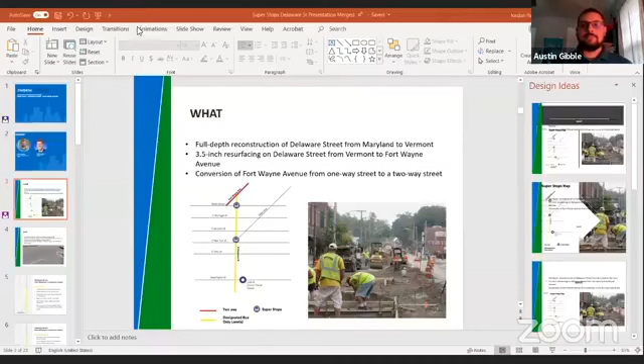If you all will forgive me, I know how to share a screen. I've done this many times. Okay. All right.

And without further ado, I will go ahead and pass it on to Austin. Sure. Hi, everyone. My name is Austin Gibble. I am a project development planner for IndyGo, and I am the acting project manager for the superstops and transit portions of the Delaware Street reconstruction project.

So we'll go ahead and do a quick overview of the basics, of what it is. This will be between Maryland and Vermont streets, a full depth reconstruction of Delaware Street. So what this means is that basically we're going down to the dirt, we're starting over with Delaware Street. Then north of Vermont Street, there will be a 3.5-inch resurfacing - grinding down that level of asphalt that's on top, putting a new layer of resurfacing above. We'll also be doing the same thing to Fort Wayne Avenue, as well as converting it from a one-way street to a two-way street.

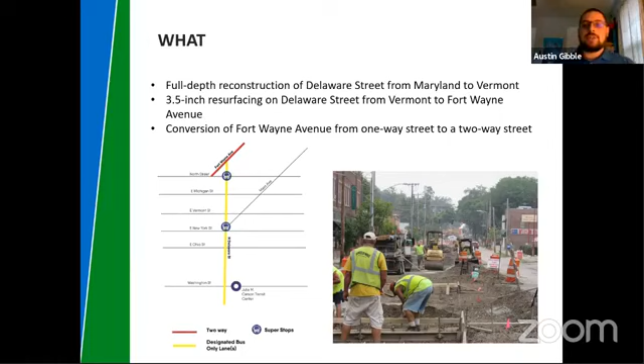And why are we doing this? The condition of Delaware Street is pretty poor. It has deteriorated to the point where we can no longer just mill it off and resurface it with new asphalt, at least between Maryland and Vermont. Additionally, there are still streetcar tracks - you can kind of see them in that picture there, if you drive on Delaware in front of the City County Building, you may see them poking out of the asphalt. Indy's streetcar system was never really dismantled, it was just kind of paved over, and these streetcar tracks result in cracks that allow water to get in, freeze, and create potholes. So we're going to take those out.

Additionally, as the Marion County Transit Plan is continuously implemented on a rolling basis, the number of buses traveling up Delaware Street from the Julia M. Carson Transit Center are gradually going to increase. So we will be adding a bus-only and bus-and-turn, or BAT, lane on the right-hand travel lane of Delaware Street. It essentially acts as a de facto bus lane already - there's already a lot of buses traveling that way on Delaware Street every 10 to 15 minutes. So what this will do is organize the street better and allow buses to continue traveling forward reliably, and also allow motorists to understand that there's going to be a bus in this lane, so you don't need to weave in and out to get around buses.

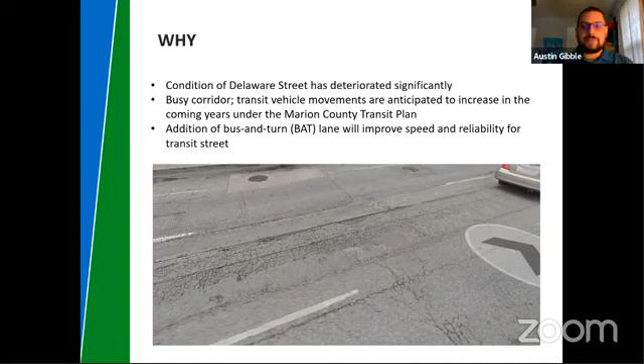So Ben, I think I will pass it on to you, or Will. All right. Hi everybody, can everybody hear me? Yes. Okay, all right. My name is William Ward. I am the lead designer for the portion of the project along Delaware Street from Maryland up to Vermont. I just wanted to give a brief rundown, a little more detail about what we're actually doing on this project.

Delaware Street from Maryland up to Vermont will be a complete pavement reconstruction. We're going to have dedicated bus lanes in this section, and they will be painted red.

Sidewalks and curb ramps we're going to improve on an as-needed basis, maintaining sidewalk when it's in good condition. Any curb ramps that aren't ADA compliant will be brought up to current standards, and any sidewalk that's deteriorating will be replaced as well.

The current signal at the transit center is going to be removed, and the old trolley tracks underneath the pavement along Delaware will be removed also.

Another intent of this project was to help improve some of the drainage that's ponding on the roadway. So the roadway cross slopes were altered a little bit throughout this area to help eliminate the pockets of standing water that you see on the pavement.

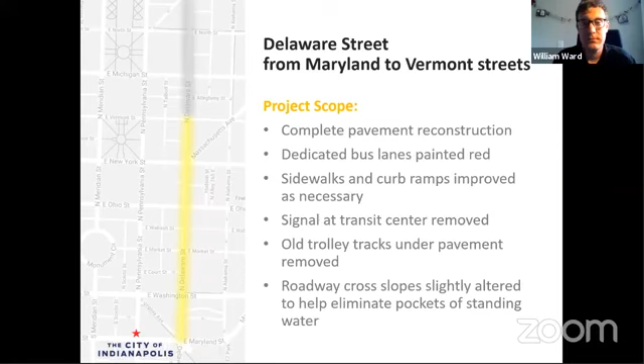As far as construction goes, the plan is to construct the roadway one half at a time, with the eastern side of Delaware Street being constructed first. After the eastern side is constructed, the eastern lanes will be opened up to traffic, and the western side of the roadway will then be constructed.

During construction, there will be no parking permitted on Delaware Street. We just need to utilize the existing parking lane as a travel lane in order to try and keep traffic moving as best as possible during construction.

Driveways to the transit center on Delaware Street may be closed for one weekend only in order to reconstruct those driveways. We're only allowed to close that for one weekend because it's a very busy bus schedule, and we need to minimize the impacts to those buses in the transit center.

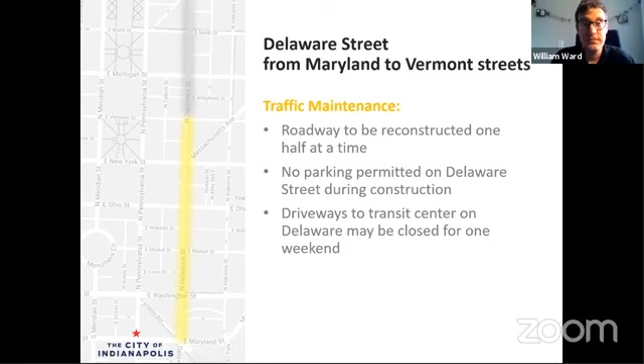Here is the typical cross section of the roadway. In the completed condition, you see that we'll have 4 travel lanes along Delaware, and you can see the addition of the bus lanes as well in front of the transit center. Bus lanes will run the length of Delaware Street from Maryland all the way up to Fort Wayne Avenue.

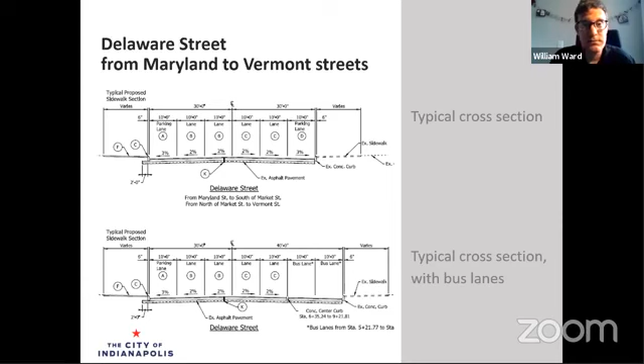Various intersections throughout the project area will be impacted. For pedestrians, the plan is also to repair the sidewalk on the eastern side of the roadway as needed during this time, so pedestrians will be detoured along the western edge of the roadway along the sidewalk on the west side.

Virginia Avenue will be closed during the western portion of the construction when the western lanes are under construction. As you can see, the traffic will shift to the east side of the roadway for this portion of the project.

Again, we will need to use the eastern parking lane as a travel lane, and pedestrians will be able to use the sidewalk along the east side of the roadway, the reconstructed sidewalk with the accessible ramps.

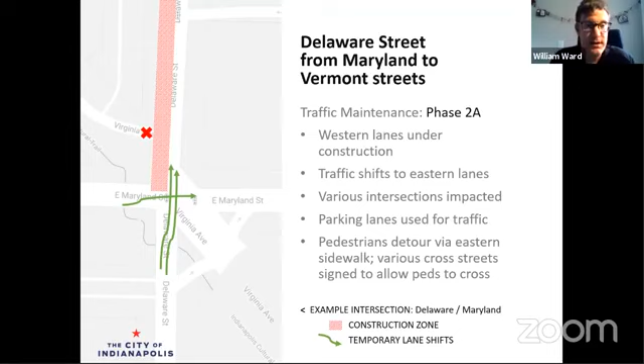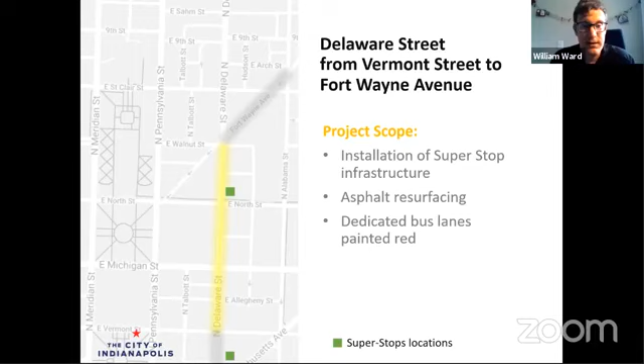The scope of the project from Vermont Street up to Fort Wayne Avenue includes a resurface, so Delaware Street will be resurfaced, and there's also going to be a super stop constructed up near North Street. Through this area as well, there will be dedicated bus lanes that will be painted red.

For the maintenance of traffic for the super stop, it's a similar concept. We'll be closing traffic on the eastern side of the roadway and utilizing the travel lanes on the west in order to fit construction equipment in there to build the super stop as needed.

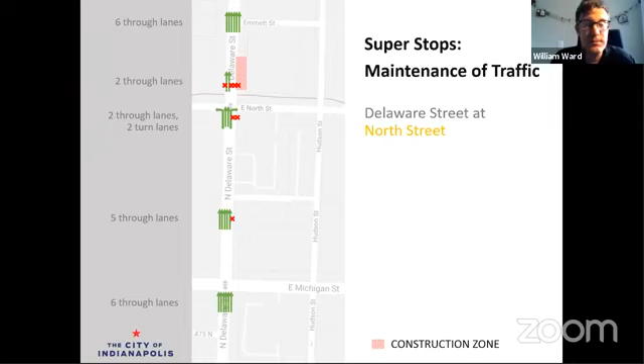Same concept here up at North Street. Construction of the super stop will result in the closure of the eastern lanes in order to get in there and do the work that the contractor needs to, and traffic will be maintained along the western lanes.

Fort Wayne Avenue from Delaware to Alabama will be resurfaced throughout this area, and the roadway will be converted from a one-way roadway to a two-way roadway, able to support two-way traffic after construction.

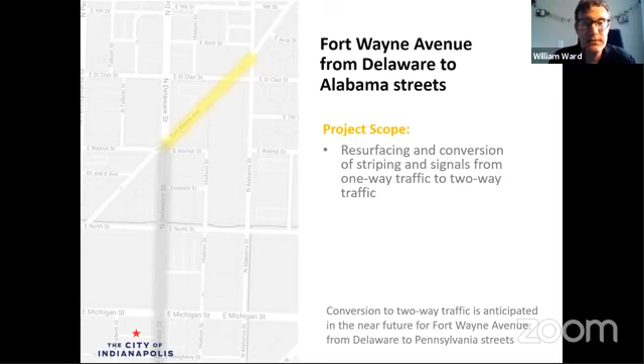During the construction on Fort Wayne Avenue, there will be a detour. It will consist of Alabama Street, a route along Alabama over to North, and then up Delaware.

Traffic on St. Clair Street will be permitted through the construction zone along with warning signage and nighttime flaggers.

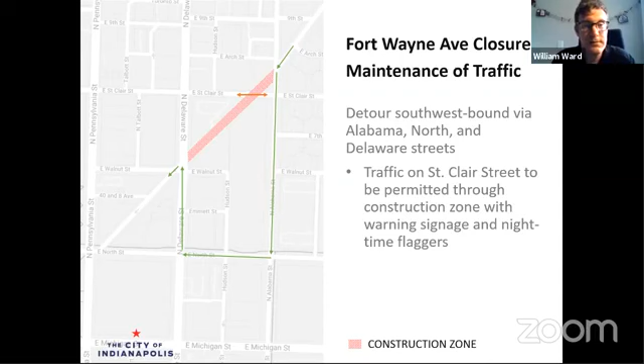So here's the super stops portion of it, and here's the transit improvements portion. The super stops are an emulation of something called Loop Link in Chicago. Same basic concept, where it's improved transit facilities and bus lanes to improve the performance of local buses on certain streets in the city center.

So it includes that bus and turn lane, but it also includes physical structures that will have real-time signage, security cameras, and larger shelters that are 20 feet long by 5 feet deep. These will have solar lighting in them. The platform itself is about 9 inches high, so it's not perfectly level boarding like you'll see on our bus rapid transit services, but the step height between the floor of the bus and the platform will be a lot less. So it's easier for wheelchair users and it's easier for people to get on and off, and it helps speed that boarding and alighting process.

Additionally, there will be a ticket vending machine. These stops are very busy, or their adjacent stops are very busy today, and these will also consolidate some existing stops. For example, the bus stop at Market and Delaware will close, and this will become the new stop or transit center. They're about a block apart.

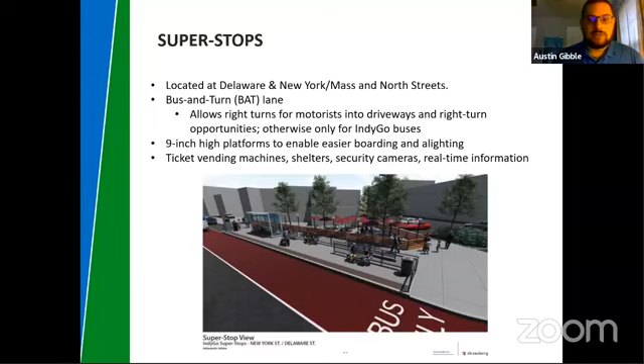This means that we need people to board and get off the bus as quickly as possible, so they can buy their ticket at the ticket vending machine and then tap it once they get on the bus instead of fumbling with cash at the fare box on board. Additionally, there will be ADA compliant ramps, some railing to designate where the waiting area is, and benches.

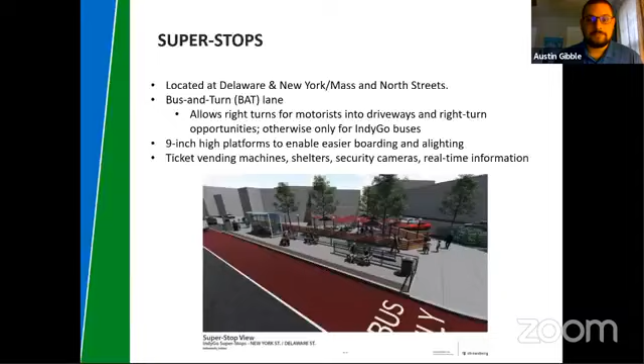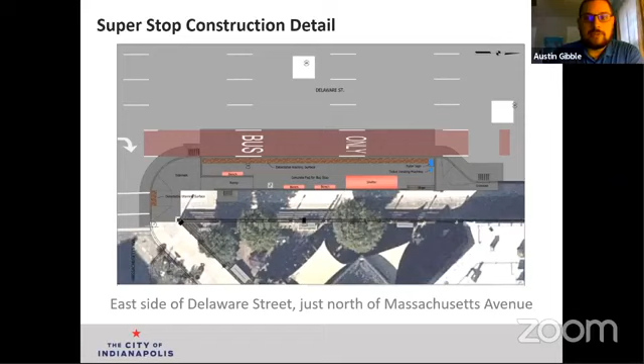This is a bird's eye view of the New York and Delaware Street stop right there at the corner of Mass Ave. You can see the curb ramp, some stairs, a ramp at the far north end to accommodate delivery vehicles, the bus only lane, sidewalk improvements, pylons, and ticket vending machines.

And this is the same thing for the Delaware and North Street. You can see that we will not be impacting the cultural trail crossing there.

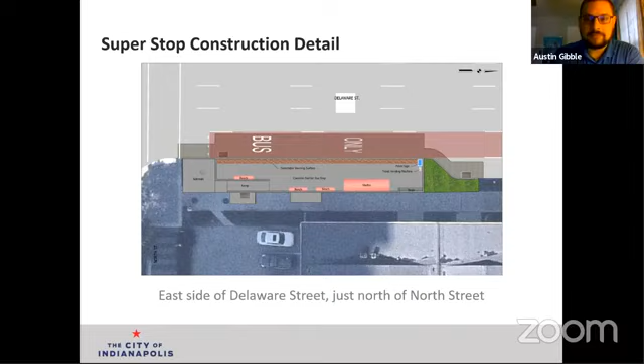This is an area where there's a super stop in the parking lane. Outside of where there's a super stop, the parking won't change. At New York and Delaware, that was a BlueIndy station that's being removed, so it's not public parking right now anyway. The Delaware and North Station has a handful of metered spaces that will be relocated.

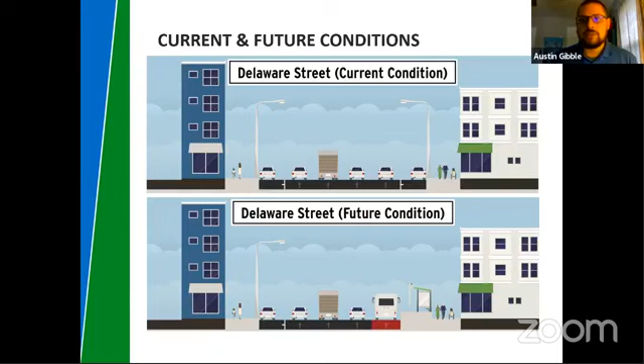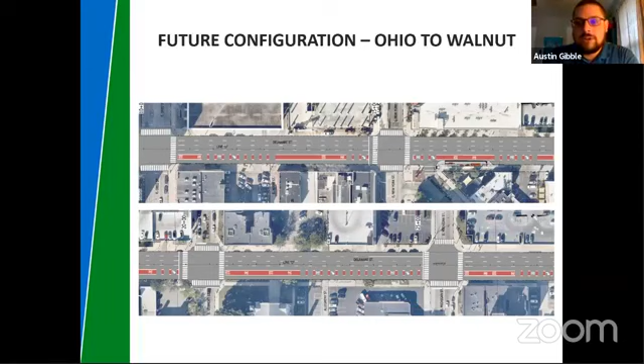Continuing up to Walnut Street, you see the same patterns to driveways there that are along Delaware Street as well as New York Street, and then continuing on up to Michigan and Walnut. And then finally, you see the approach up to Fort Wayne Avenue.

Fort Wayne Avenue will, at this location, be converted to a 2-way street. One of the benefits of converting Fort Wayne Avenue to a 2-way is that it eliminates a few pinch points for our bus routes. A couple of our busiest bus routes, the number 10 and the 19, currently make 2 hard turns, one onto North Street and then again on Alabama, to then reach Fort Wayne Avenue and go over to Central and 10th Streets.

This causes a problem if any drivers pull past the stop bar at these intersections. The buses have to make this wide swing in order to make those right-hand turns, and if a car is pulled up too far, the bus can't make that turn. So the car then has to back up or pull to the right and go around. It's very challenging and results in delays. With this new configuration, the buses will be able to just go up to Fort Wayne Avenue, make a soft 45-degree right-hand turn, and continue straight up to Central and 10th Street.

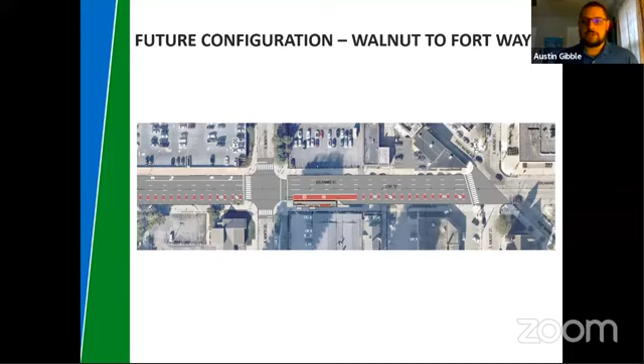Our construction timeline currently has all of this work starting in the first quarter of 2021, keeping that window because we're not really sure what winter is going to bring this year. Always got to have that contingency in place. We anticipate substantial completion by the end of October, with everything fully closed out by the end of 2021.